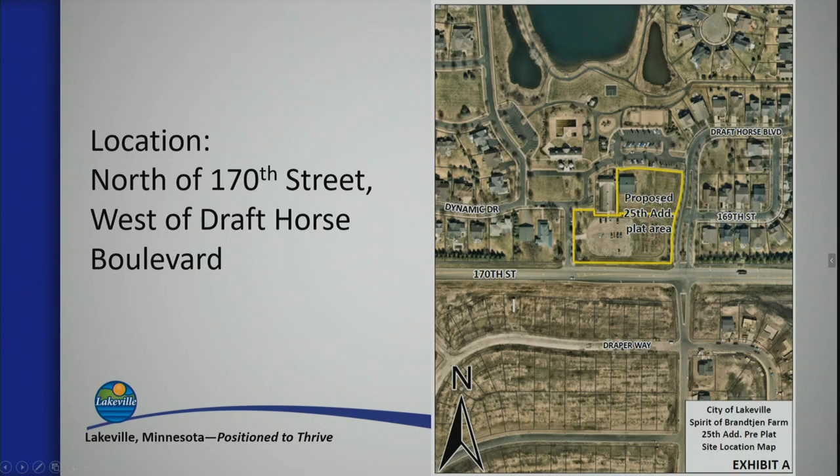So the PUD amendment is for the master Spirit of Brandtjen Farm planned unit development. The farmstead preservation area had certain uses that were allowed within it. And from that original PUD ordinance, those allowed uses were those uses within our OR, which is our office residential district. And then I've listed the additional uses that were specifically called out that would be permitted on the site.

Again, some of the smaller restaurant, takeout food, architecturally themed mini storage units, real estate offices, things like that. It was a real mix of items that were considered appropriate for potential development in that area. So again, this is the aerial view of the site a little bit closer in. This is Draft Horse Boulevard here, 170th on the south, and Brandtjen Farm Drive wrapping up and around.

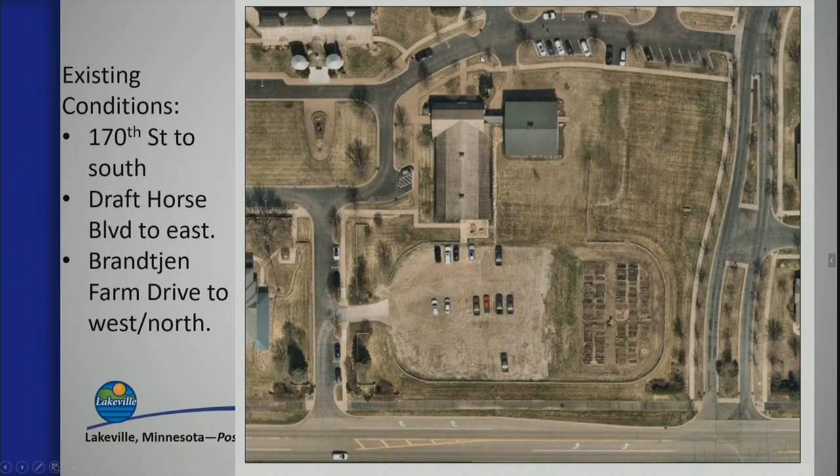They do front on Draft Horse Boulevard, but they do not have driveway access to Draft Horse. That will be along the rear side. There's a proposed access aisle to provide access to the rear garages, and there are some guest parking spaces in this area as well.

This access connects from Brandtjen Farm Drive through to the parking lot for the office area. It is currently a gravel or unpaved surface, and it will be paved and striped as part of this project as well. This is just the plat area.

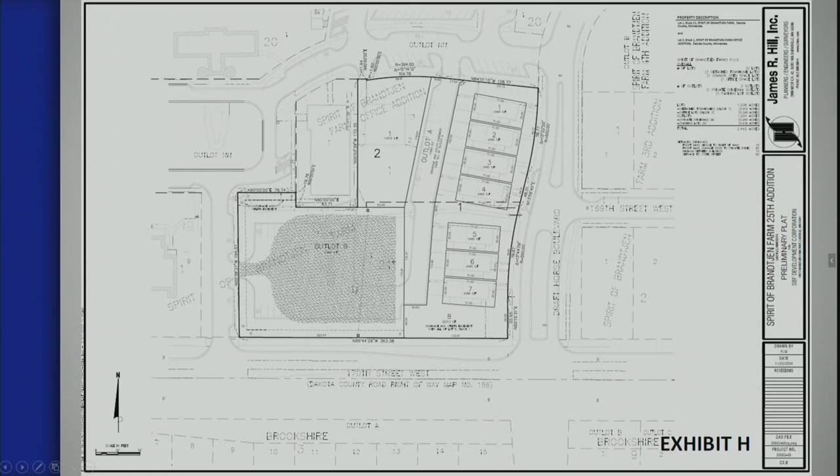I should also point out, let me back up here. There is a proposed sidewalk through the units for a pedestrian connection to connect over through here to these more common public areas of the Brandtjen area, so folks don't have to go all the way around. It provides some additional connectivity in there.

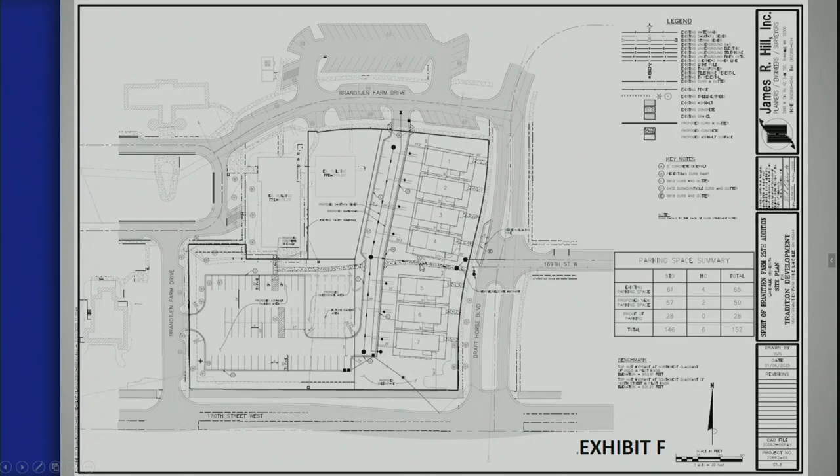And these are, again, as Mr. Rossi said, very similar to the Revival Townhomes that have been built on the north end of Brandtjen Farm.

I did mention earlier, you have revised stipulations in front of you. Couple of reasons for the revisions. One, there was misnumbering, so there's actually only 13 stipulations and not 14. The one change to a stipulation was regarding, let me find it here, number 11, the bottom of the front page. There was some disconnect between the engineering and the planning report as far as whether park dedication had been satisfied or not.

Staff's going to do some additional research just because of how the park dedication was done for this. So we'll figure that out, and if there's park dedication that's required, it'll be addressed with the final plat. So this is just updating that language to that effect. Staff does recommend approval of the preliminary plat, the PUD amendment, and the development stage plan, subject to the 13 stipulations. I'll stand for any questions you may have.

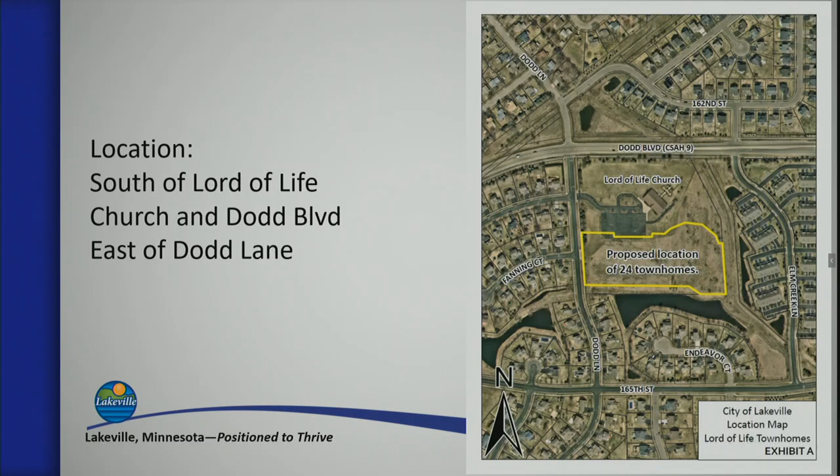Good evening, Chair, Commission members. As mentioned, this request is for a property, a 5.74 acre piece located south of Lord of Life Church, east of Dodd Lane and south of Dodd Boulevard. The property was approved for a rezoning and comp plan change last year in September of 2024. It's now zoned RST2, a single and two-family residential district, with a comprehensive plan designation of low to medium density residential. The request in front of you tonight is the preliminary plat for a 24-lot twin home development that includes one outlot dedicated to the city for stormwater management, and one common lot with shared amenities maintained by the HOA.

The request is also for a variance for cul-de-sac length. There's one road that goes into the development, Esprit Court, proposed at 638 feet. The maximum length in code for a cul-de-sac is 600 feet, so they're asking for a 38-foot variance. They're also asking for a vacation of the existing drainage and utility easements found on the parent parcel. You can see in the upper right-hand corner, on the southern and western east boundaries, the existing perimeter easements will be vacated and then rededicated on the new plat.

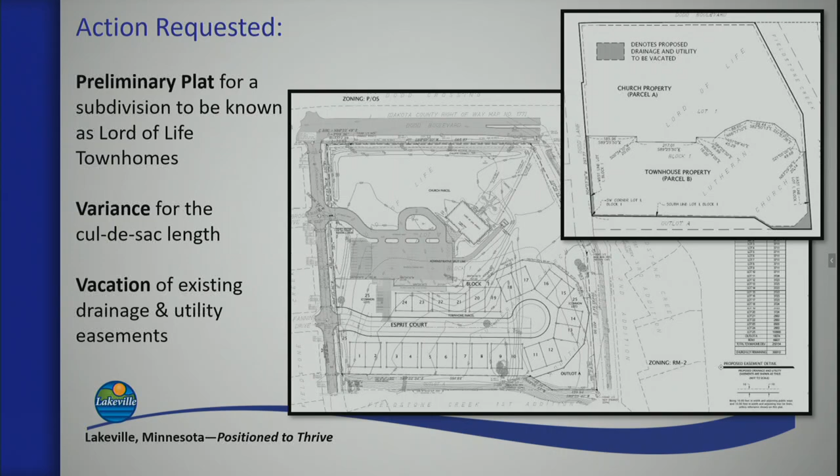So the proposed development complies with the minimum lot area requirements and setbacks for the units.

I just want to make sure your guys' screen is still active. My screen here went blank in front of me, so you guys can still see it?

The applicant is proposing sidewalks on both sides of Esprit Court, which will connect the development to the common area and also bring both sidewalks out to Dodd Lane.

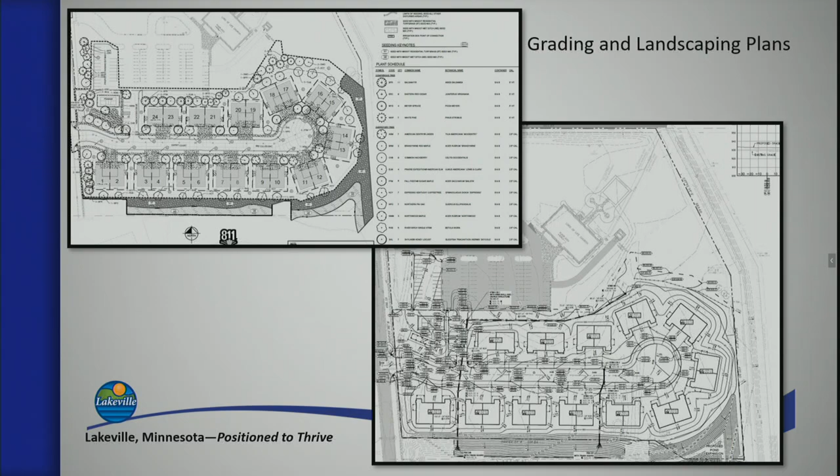There are no wetlands on the property. Grading of the site does include modifying and increasing the size of an existing public basin in the southeast corner, and those modifications lie within Outlot A that will be dedicated to the city. Landscaping is proposed along Dodd Lane and throughout the development.

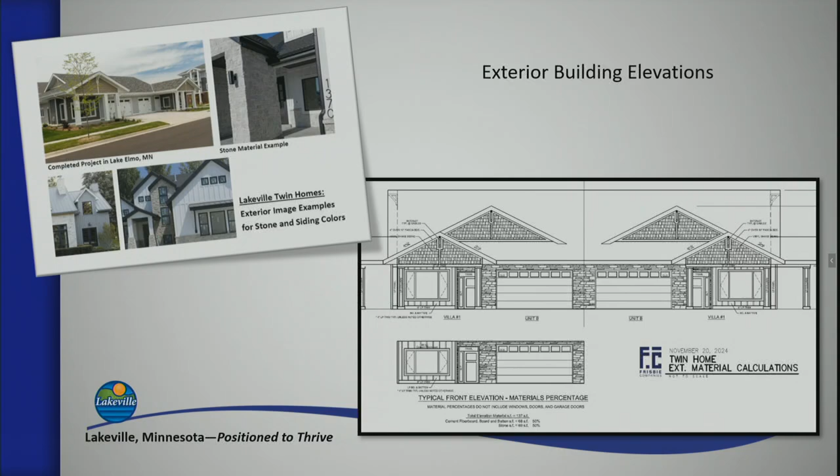The applicant has submitted exterior elevations of the townhome units and proposed building materials, and what was submitted does comply with city requirements. Staff is recommending approval of all three requests with the 7 stipulations listed in your report and the findings of fact included with the packet for the variance.

Thank you. All right, thank you.

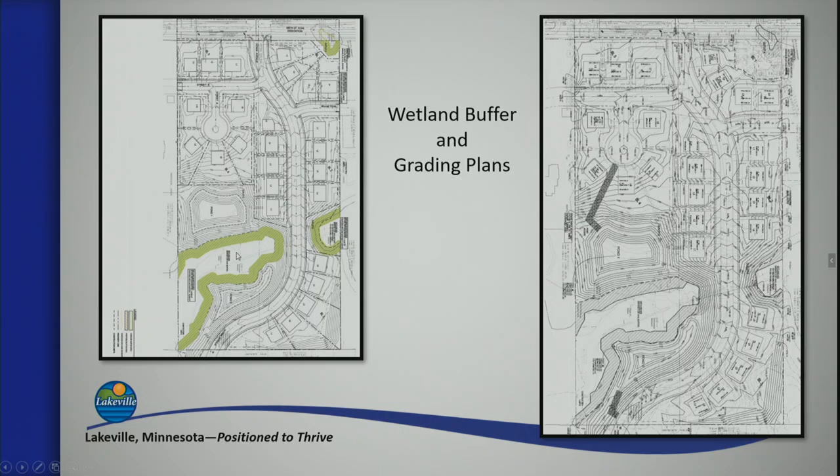I just have one further question. Some places in Lakeville have an underpass for the deer and things like that. Is there anything that would call for something like that in what you guys have seen and noticed?

Nothing that we've noticed. I don't know if the county would ever think about doing that as part of their reconstruction for 185th Street when they put that in, but as for this development, that wasn't something that was really contemplated because it should allow still some movement east and west through the development through that wetland area. But the county road getting from the north side to the south side, I'm not sure what they would want to do for that.

Madam Chair, since we've started to delve into the county road issue here a little bit, first one is for you. Just want to make sure that obviously we got reconstruction starting soon on 185th Street in this location. I'm assuming this plan is coordinated with what's going on with Dakota County's plans for the road?

Correct. Yeah, we've coordinated our entry drive location to match up with where the crossing is. We still, once the plat gets approved, do have to coordinate just a little bit of construction of some turn lane that the county would require to turn into this development. But it has been coordinated and laid out to match up with what they're proposing.